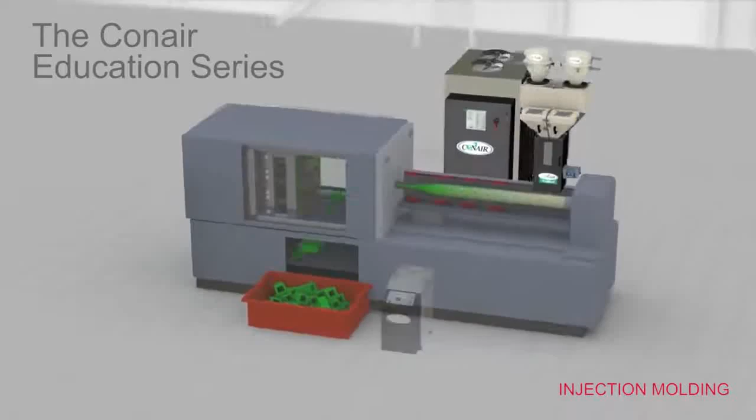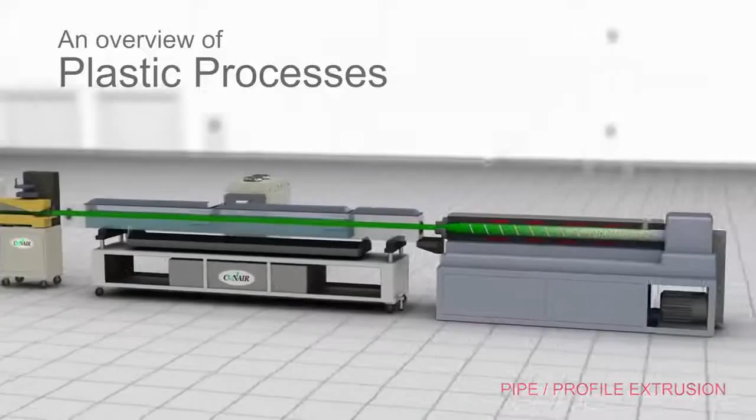In this program, we'll explain the various types of processing machines used to make the wide range of plastic products in use throughout our lives.

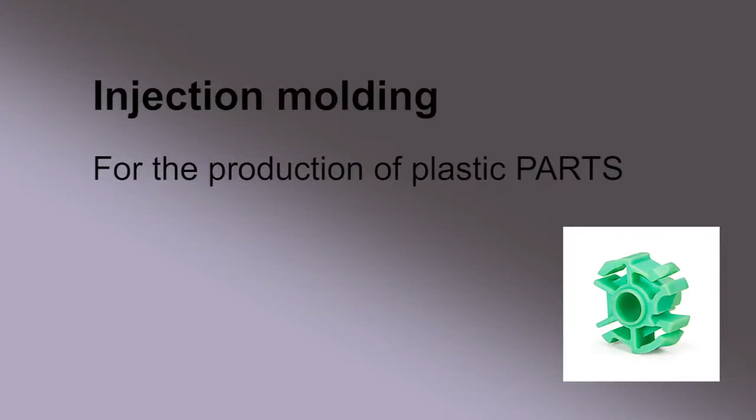A good start is injection molding. Injection molding is used to make plastic parts using two-part molds that, when closed, are injected with melted plastic to form individual parts. Here's how it works.

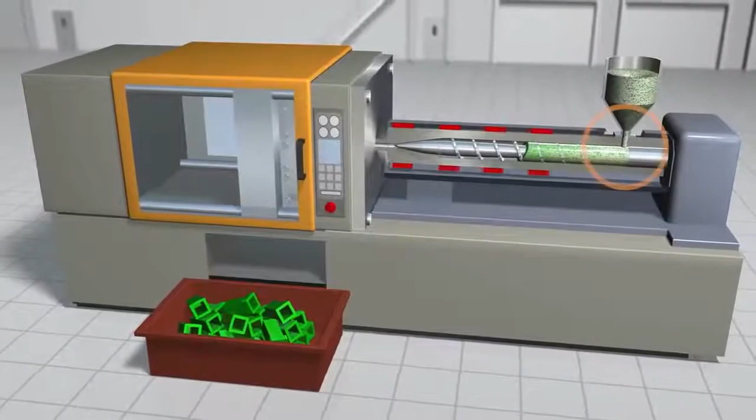Material gravity flows into the injection machine's screw, where it is melted by the compressing motion of the screw and then injected into the mold to form the part or parts.

The mold is quickly cooled, letting the parts solidify. The mold opens to release the parts, and the mold closes again to repeat the cycle over and over again.

Molding cycles can last anywhere from 1 second for tiny parts made in tiny molding machines to minutes for large parts made in presses the size of a building.

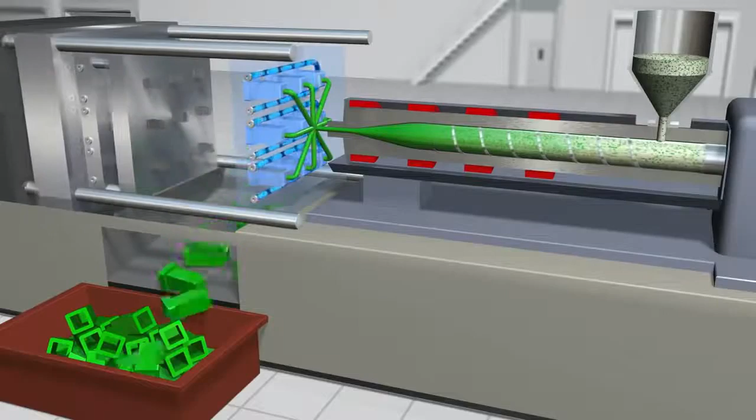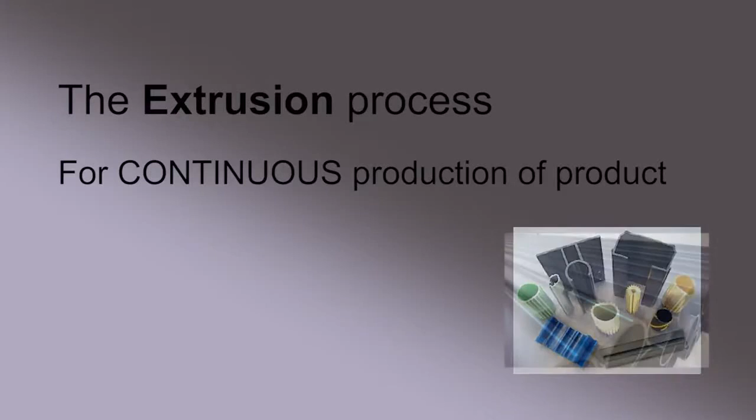Extrusion processes use the same plastic melting operation as injection molding, but there is no mold, and the resin compressing screw rotates constantly, and product is created continuously.

Extrusion uses a die, a hollow form that molten plastic is pushed through to create its specific shape and thickness.

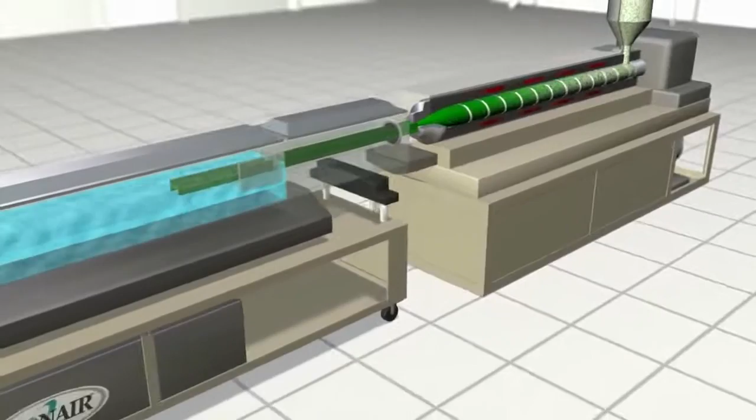A water bath or spray chamber then cools the extruded shape and often provides pressure and/or vacuum controls to properly size the product as it passes through.

Belts or cleated pullers apply smooth tension on the product and keep it moving in pace with the extruder. A cutter or saw creates the final product length, or a winder creates spools of the final product.

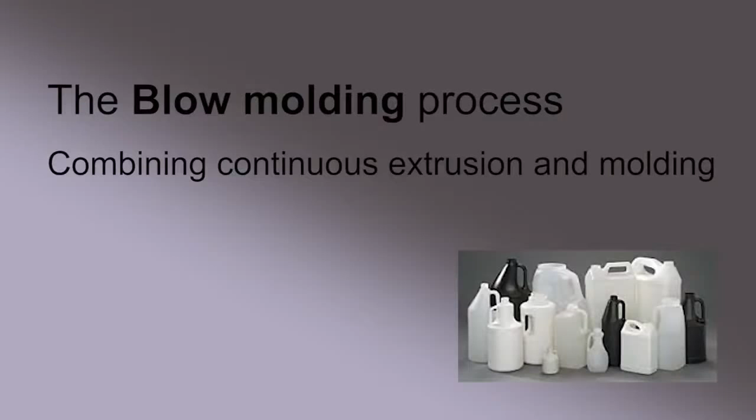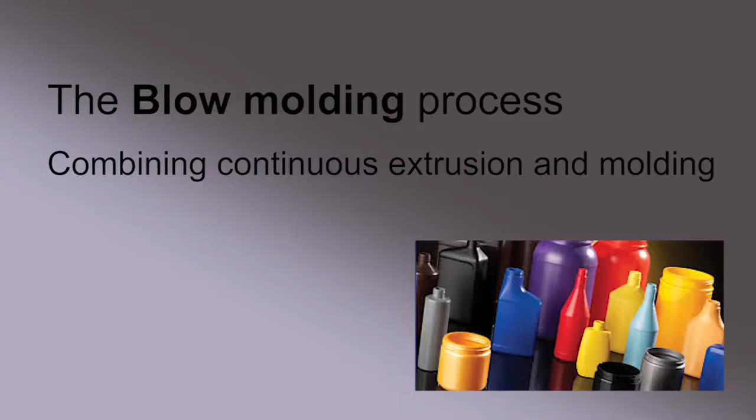There are many variations to the extrusion process, but a mixture of extrusion and molding is found in the blow molding process, where plastic is continuously extruded into a tube shape and then clamped in a mold and blown into its shape with compressed air.

It's a process that often operates in a shuttle movement with a set of molds. Each mold takes a turn grabbing a section of extruded tube, called a parison, and shuttling it to one side

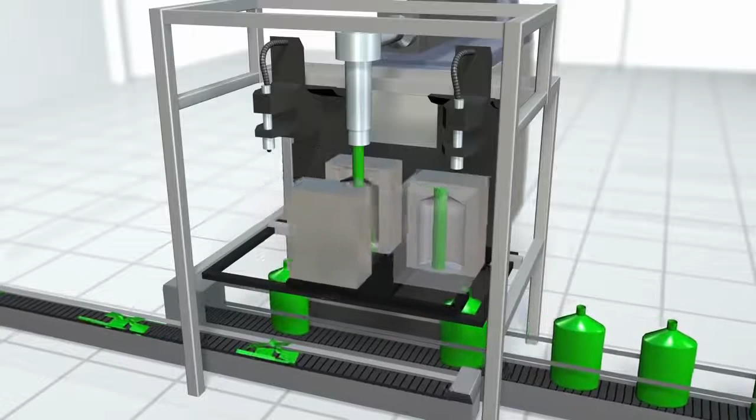to blow it into a bottle shape, letting it cool and then releasing it to be filled with product or shipped. Each mold alternates with a second mold doing the same thing for maximum productivity.

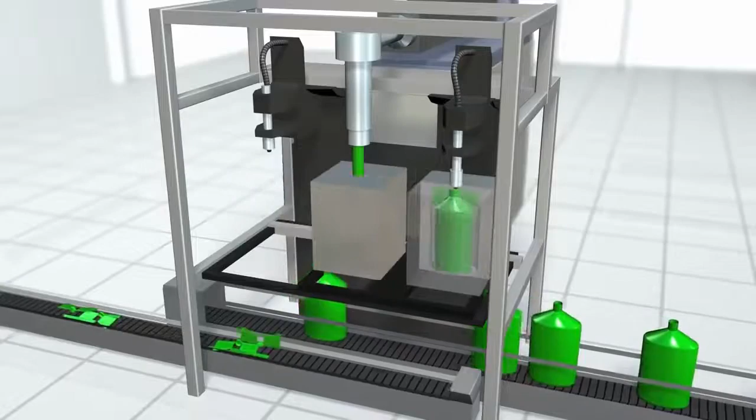The same blow molding process can also utilize multiple extruders for what is called co-extrusion. Co-extrusion is used to create bottles made up of multiple layers, and each layer possesses special characteristics like suitability for

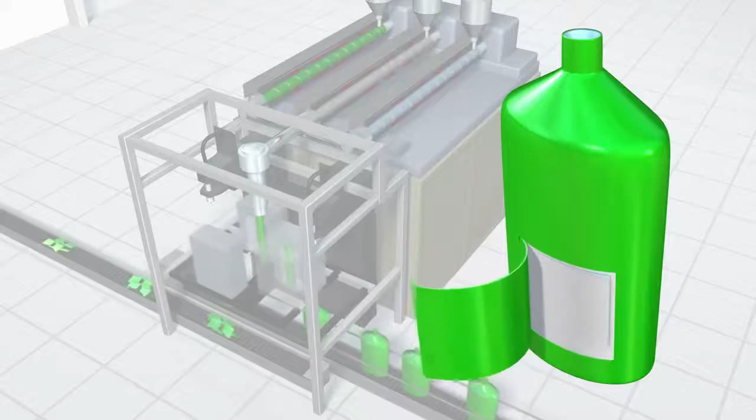food contact, an outside color for brand awareness, ultraviolet light protection for long shelf life of the product, a layer of regrind for economical reuse of scrap, and many times barrier and adhesive layers are included to separate and bond the layers for a tough, cohesive bottle.

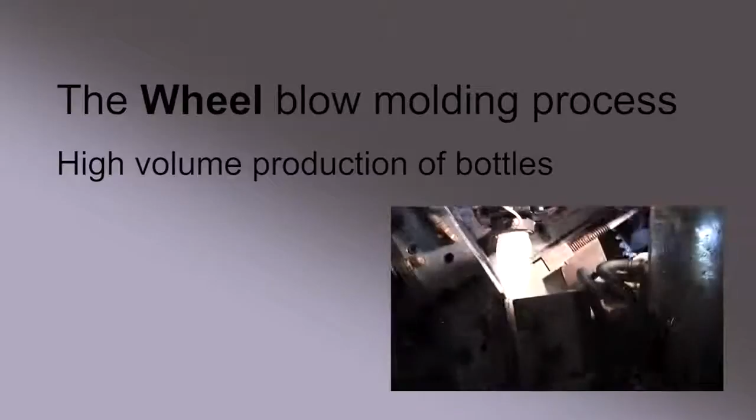A high volume form of blow molding uses many molds mounted onto a continuously rotating wheel mechanism. The extruder creates a hollow tube, and as the wheel rotates, each of its molds will open, grab a parison

from the extruder die, blow the parison into a bottle, allow it to cool, and then place it onto a conveyor, producing a continuous stream of finished bottles originating from that continuous flow of plastic from the extruder.

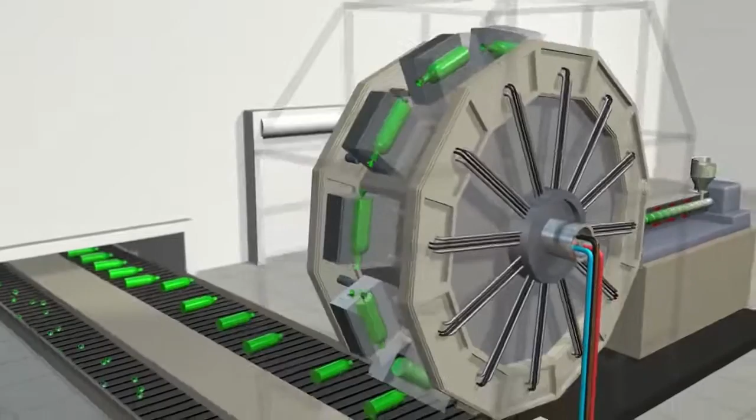These wheel machines can also produce co-extruded bottles containing layers designed to meet the needs of the product and to use reclaimed material for maximum economy and recycling benefits.

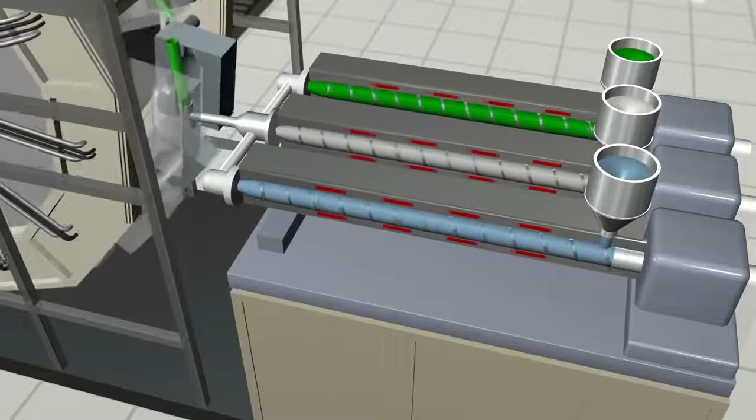The very popular sales of plastic bottles for carbonated beverages has created a unique process for blow molded bottles made specifically from polyethylene terephthalate, or PET.

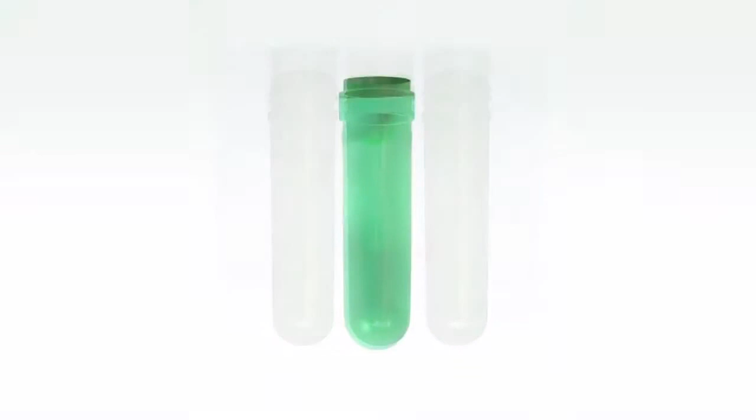For PET blow molding, bottles are first created in a test tube shaped, injection molded preform, and then, in a separate operation, reheated and blown into their final shape.

This two-stage process creates bottles that we, as consumers, know to be thin-walled, yet capable of containing gaseous carbonated beverages without losing pressure or exploding, even if they are dropped.

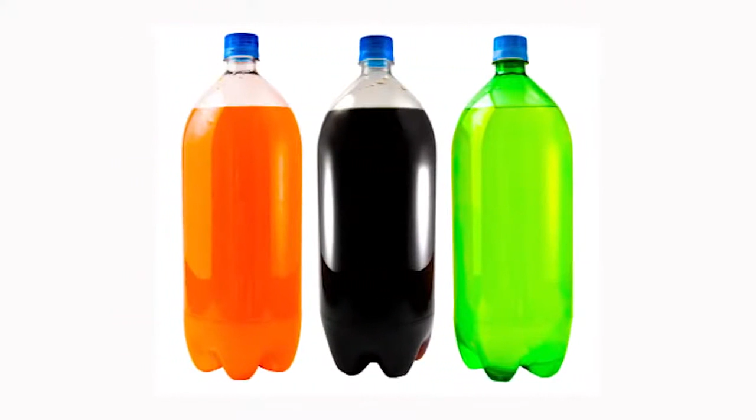In the blown film extrusion process, thin plastic material for products like garbage bags or the sheeting used in construction, industry, and packaging are produced.

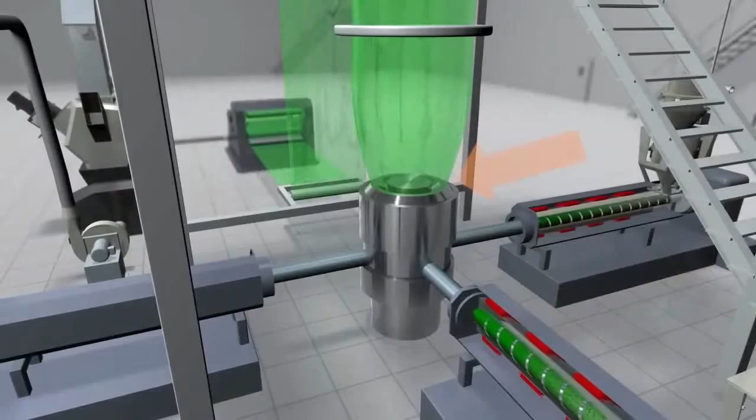A very thin die opening, which is often fed by multiple extruders, faces upward in a round shape. A tall, thin, continuous bubble is produced vertically by this process, and it's cooled